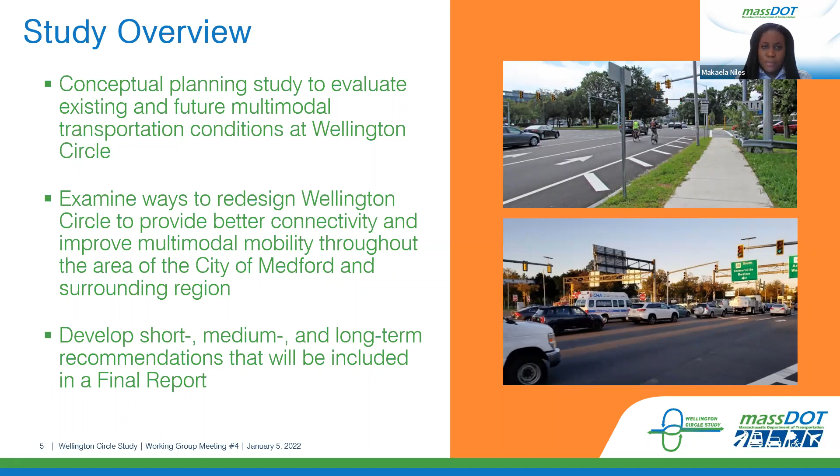Thank you, Makaela, and good afternoon. So I'm going to run through quickly the process overall for developing the alternatives and concepts that we've been walking through and where we're at this point.

You recall previously we had shared some preliminary concepts, how we were screening those through fatal flaws, but we were primarily at that point talking about automotive traffic and how vehicles are getting through here as that first level of assessment to start to develop some concepts, with the promise and the understanding that we're going to start looking at pedestrians, bicycles, transit. That's really what we've been doing since we last met, screening those alternatives through those modes, looking at additional fatal flaws to try to filter out and refine those concepts, and then identifying the feasible concepts that we can take into that detailed alternatives analysis, comparing and evaluating them based on the goals that were established.

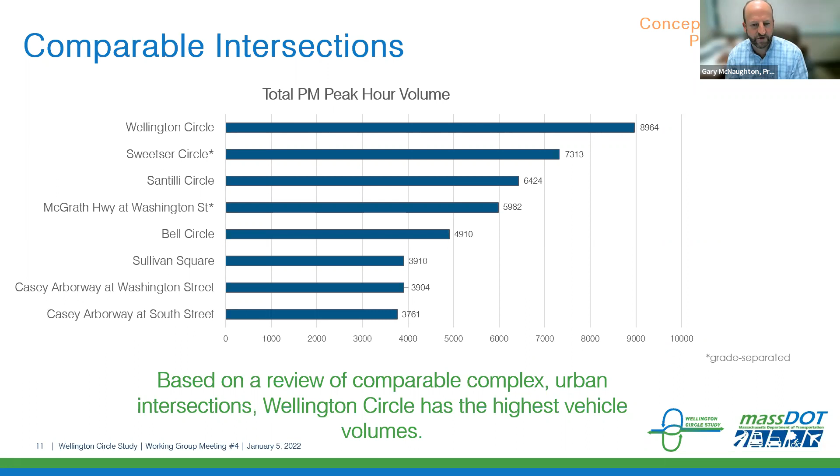When you go down to the bottom of the list at Casey Arborway, for those familiar with the Forest Hills area, the two main intersections are each carrying less than 4,000 vehicles per hour. So it really does put in context where Wellington Circle sits in terms of how much traffic is processed through this intersection. It's quite an amazing amount—even the other grade-separated ones don't approach that volume. So you see the challenge we have in trying to come up with solutions to improve operations and accommodate additional modes through this area.

As you recall, we looked at some basic concepts, typical intersections and how those could work. We concluded, not surprisingly, that a traditional intersection isn't really going to be the solution here, but there were benefits of pulling that Middlesex-Fellsway connection out of the primary intersection along Route 16, which we'll talk about in a moment regarding short and medium term concepts, and you'll also see that carried forward into the long-term concepts. We also talked about advanced concepts—continuous flow and quadrant roadway—which I'll touch on in a moment, and grade separation, where we'd narrowed it down to that east-west connection as the one showing potential for a grade separation alternative.

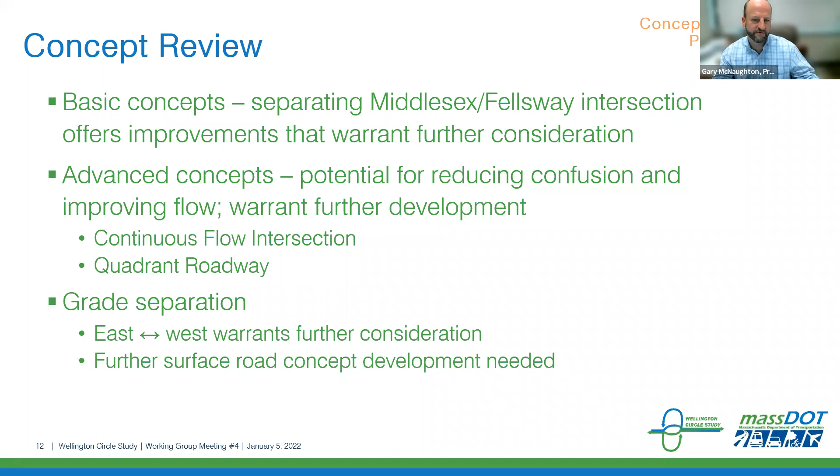When we looked at the continuous flow intersection, the concept is that left turns cross the opposing through traffic in advance of the intersection so they're able to flow at the same time as through movements. We had some early promise on this, but as we looked further, it started to fall behind the quadrant roadway example. The challenges for pedestrians and bicyclists through the continuous flow intersection became problematic—picture vehicles coming at you from unexpected directions as you're crossing the roadway. So we ended up dropping this from consideration, and you won't see any more continuous flow alternatives as we advance the project further.

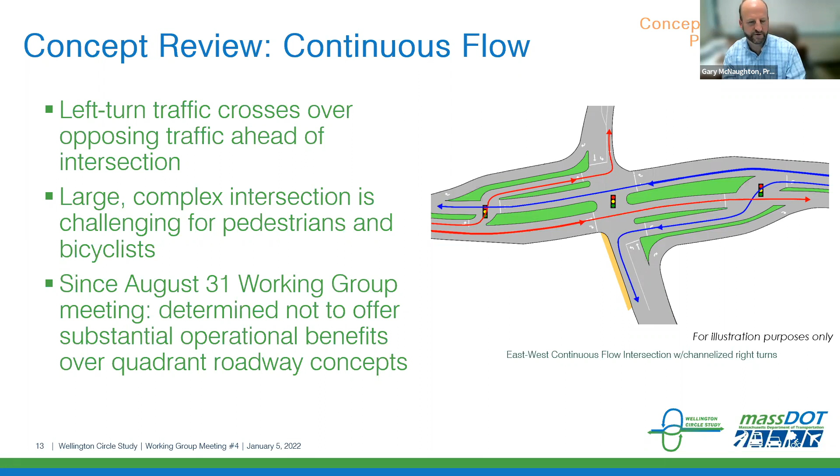But the quadrant roadway connection did start to show some promise in this area—not just for that connection from the south and off to the east between Fellsway and Revere Beach Parkway, but you'll see elements of it on the north side connecting up to Fellsway and off to Revere Beach Parkway, where we started to see some benefits. It lets you redirect those heavy volume connections out of the main intersection and shift them off to a separate intersection, so individually your intersections can be simplified. They don't have to accommodate every movement—we can restrict left turns and such at those intersections to make them work more efficiently.

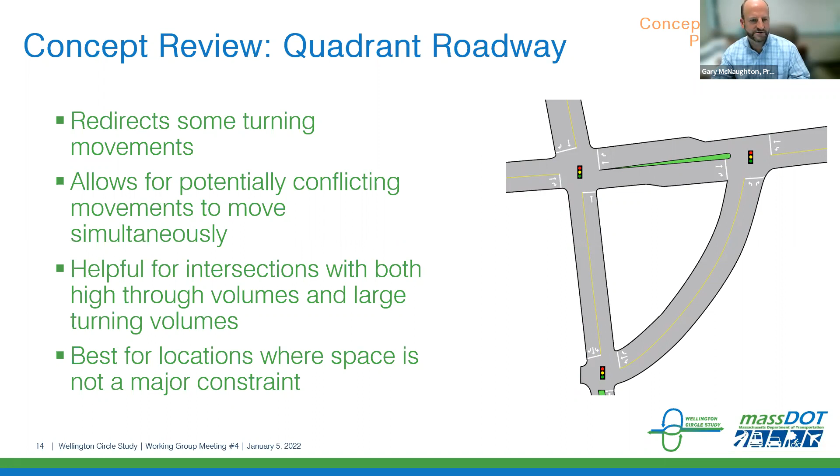So some examples of quadrant roadways, what do these look like in the real world? These are not directly applicable, it's hard to find an environment exactly like Wellington Circle, but we tried to pick a sampling of other locations around the country. You can see that these offer different opportunities for land uses within the middle.

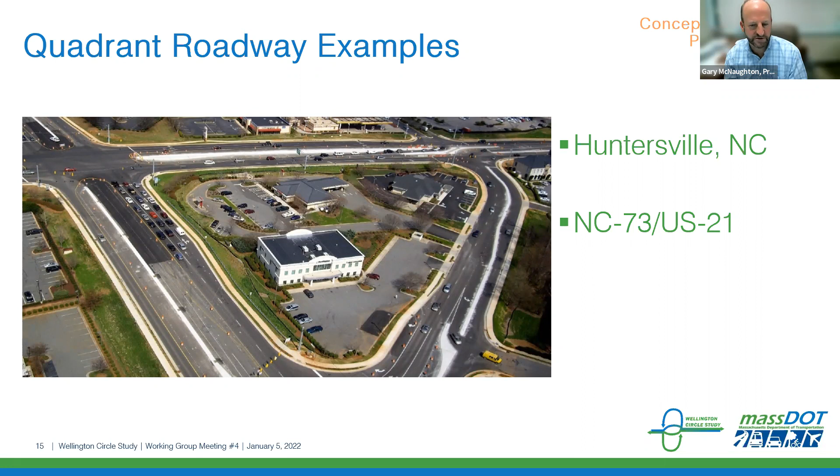We're not anticipating putting buildings in there, but you have access to those areas between the quadrant roadway. You can still provide connections onto the outside. You end up with signals at each end of the quadrant roadway, as well as at the primary intersection, which is what you'll see on the alternatives as we've advanced them.

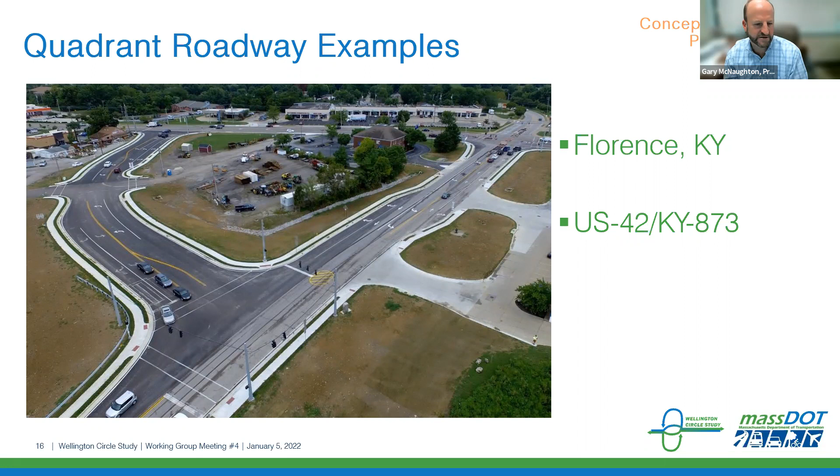This is another example, again just showing a little bit less intense use in the middle. This is mostly construction laydown areas, the project is still being built. But again, another example showing how that quadrant roadway looks, how you can still use it to maintain connections to those abutting properties.

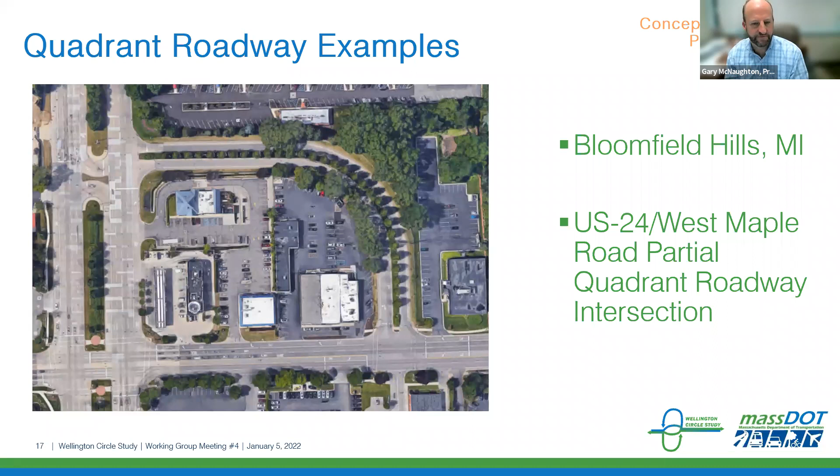So where we're at is we're really looking at two core long-term concepts. One is a grade separated one, which we'll talk about towards the end. The others are variations of that quadrant roadway concept, and we have two different flavors we'll be talking through. Each has slightly different benefits, advantages, and disadvantages that we'll be evaluating as we advance the project forward. We've also been developing short and medium term concepts, things that can be implemented that aren't full build, don't require the entire intersection, but we think can offer benefits to improve mobility through the area without having long-term design efforts and construction impacts.

We've also been spending a lot of time working at other modes, trying to figure out how every one of these alternatives handles peds and bikes traveling through them. We've been considering transit, but we'll talk about why we don't have transit quite as fully developed, given moving parts like bus network redesign and Silver Line and other things that may change the routing we're looking at. But we're certainly considering transit as we advance through the project and alternatives development.

The one thing we have taken off, and you may recall we talked about this before, was possibly converting Middlesex Ave to one-way northbound, away from the intersection, to remove that movement and simplify operations. When we started playing around with that and incorporating it into concepts, we saw that it didn't give us benefits that outweighed the impacts of changes in travel patterns that resulted in vehicles diverting to already congested areas, really creating more problems than it solved. So we've taken that one out of our alternatives at this point.

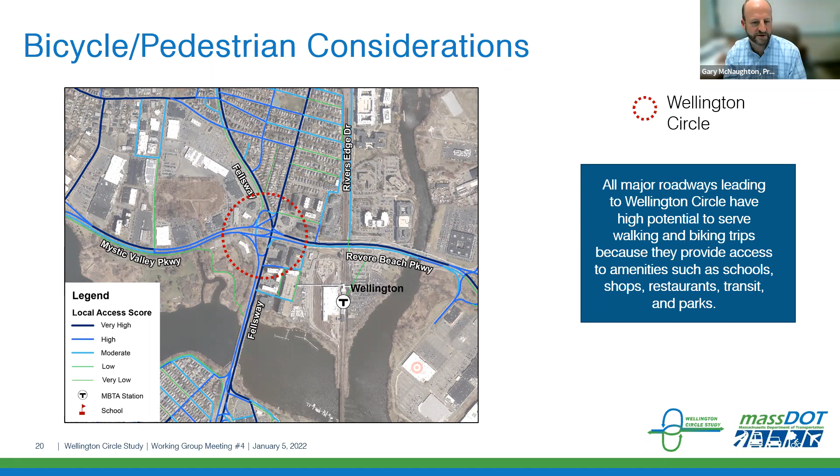When you look at the bicycle network in the area, you do see that void. There's a big gap between some of the existing and planned bicycle facilities, and Wellington Circle becomes that area that's a barrier to connecting between these different facilities. We're really working on making sure that barrier is removed so bicyclists can get through this area and make connections to those other facilities being constructed.

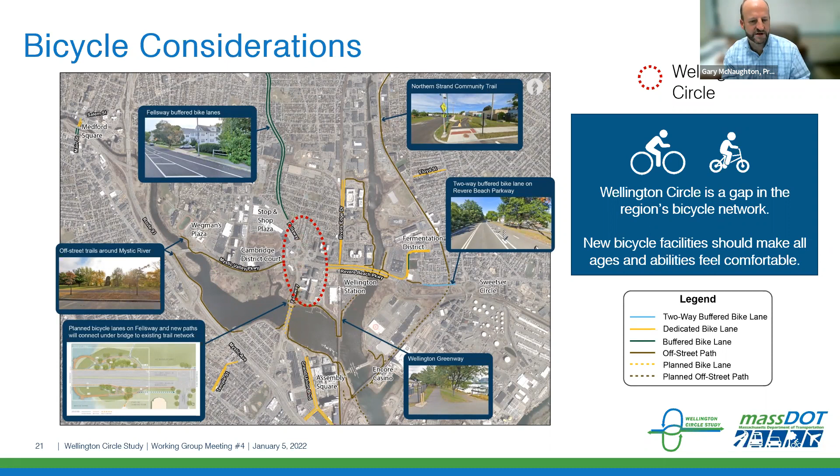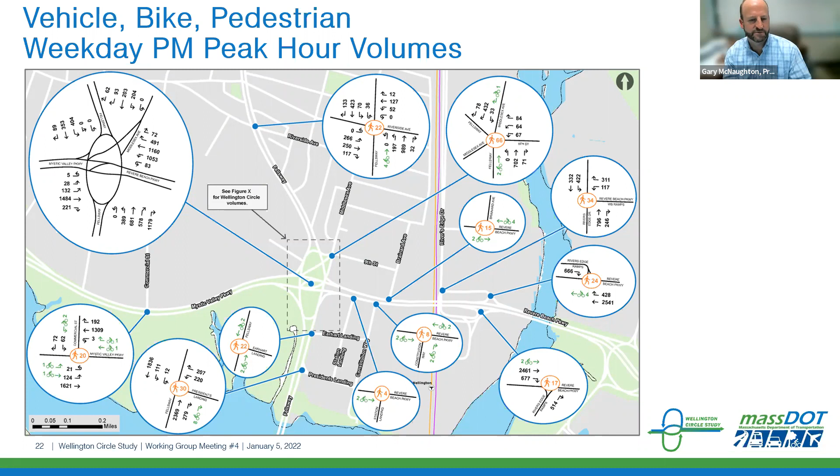We also have all of the data behind it, not just the vehicle volumes we've been talking about previously, but all of the pedestrian volumes. This information has helped inform us on desire lines, where pedestrians need to connect to. We also have the bicycle volumes. Not surprisingly, they're very low in this area, but we also know there's a high potential for bikeability, and if we build it, they will come. So we're not just tying our hands with the bicycle volumes that are out there. We're really looking at building facilities that will encourage more folks and accommodate the folks that would be here if they could be here comfortably.

So I'm going to turn it over to Deanna to talk briefly about some of the short and medium term alternatives. Thanks, Gary. So as Gary mentioned, I'll be discussing the short and medium term concepts that we started analyzing. This includes dechannelizing right turn movements, removing the eastbound left turn movement through the circle, relocating Middlesex Ave, and then a combination of the above concepts.

In some circumstances, dechannelizing right turns can improve connectivity, reduce pedestrian crossing lengths, and increase pedestrian comfort. But they can also create high vehicle delays, long queues, and challenges with signal phasing and timing.

So we've started to look at each quadrant separately and determining the pros and cons of dechannelizing each of the right turn movements. Currently, the northbound right and the westbound right in the northeast quadrant are signalized and have high right turning volumes, particularly the northbound right, which has very high volume.

We haven't shown this dechannelization being taken away because it's really clear in the analysis that it needs to stay. It is possible for the westbound right to be dechannelized depending on other improvements that are proposed. The southbound right and the eastbound right are currently unsignalized and could possibly be dechannelized and brought under signal control. The southbound right is low volume and the impacts are less.

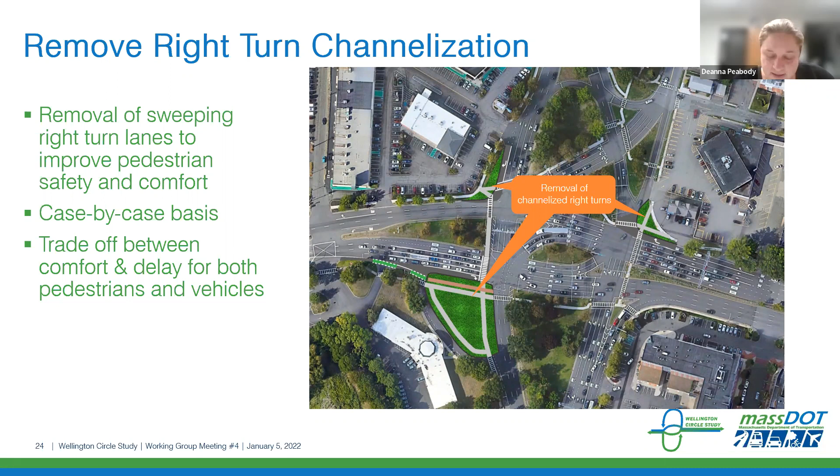Another concept we've been analyzing is prohibiting the eastbound left turns from Revere Beach Parkway to Fellsway northbound. This is not a major movement through the circle and would reduce delay for the westbound movements, which are very heavy, particularly the westbound right turns, by removing a conflict from the intersection.

Since it improves the westbound movements, it also mitigates the impacts of removing the westbound right turn channelization on the northeast quadrant. As you can see, this would enhance eastbound bicycle accommodations and shorten the pedestrian crossing distance across Revere Beach Parkway. This concept would also require the removal of the eastbound right turn channelization so that vehicles that would have taken a left will then be able to instead take a right before getting over to the left lane and making the U-turn to head northbound.

So that would be a requirement for this alternative.

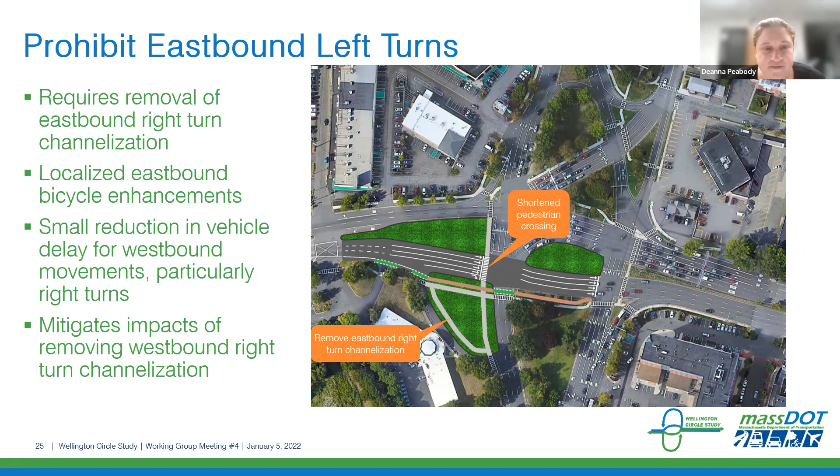Another concept we've been analyzing is relocating Middlesex Ave so that it intersects with the Fellsway north of Wellington Circle. This reduces vehicle delays for critical westbound left turn movements as well as southbound movements on the Fellsway by removing a fifth leg to the intersection and taking out a phase from the intersection, allowing for reallocating time at the signal. As you can see, this provides a large opening of green space, as well as simplified, reduced, and shortened pedestrian crossings.

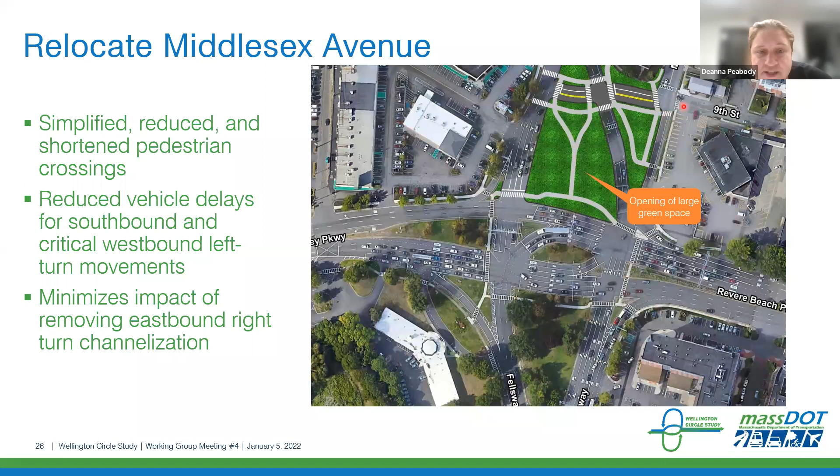This also minimizes the impact of removing eastbound right turn channelization.

This alternative combines the last two to eliminate both eastbound left turns as well as relocate Middlesex Ave. The results of this alternative combine the improvements from the last two alternatives, with overall operational benefits for both pedestrians and vehicles. It also mitigates the impacts of removing the right turn channelization in both the eastbound and westbound directions.

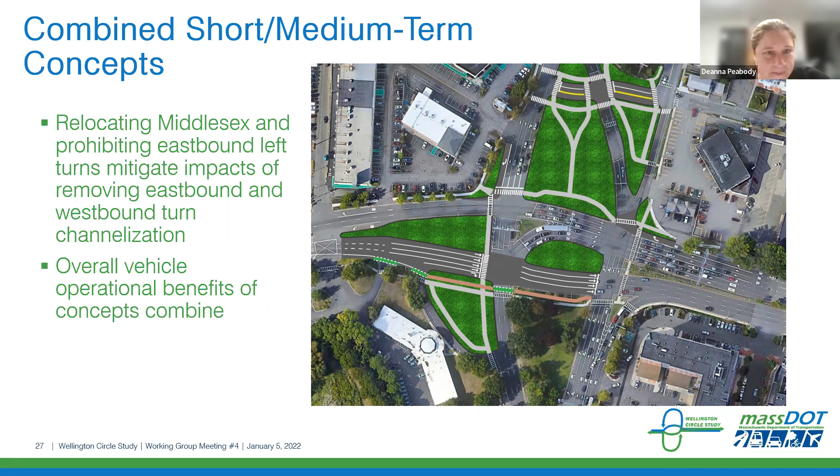In conclusion, we are continuing to investigate these short-term and medium-term concepts to determine what makes the most sense to come out of this study for recommendations. I'll now turn it over to Conor to discuss the longer-term alternatives.

Thank you. As Gary was discussing, we've primarily been looking at the vehicular concerns in and around Wellington Circle, but we've put more of a longer term focus on improving multimodal transportation throughout Wellington Circle. I'm going to go into some of the potential considerations that will be included in the concept and the overall final design of Wellington Circle and the at-grade alternatives we've developed or that will be developed.

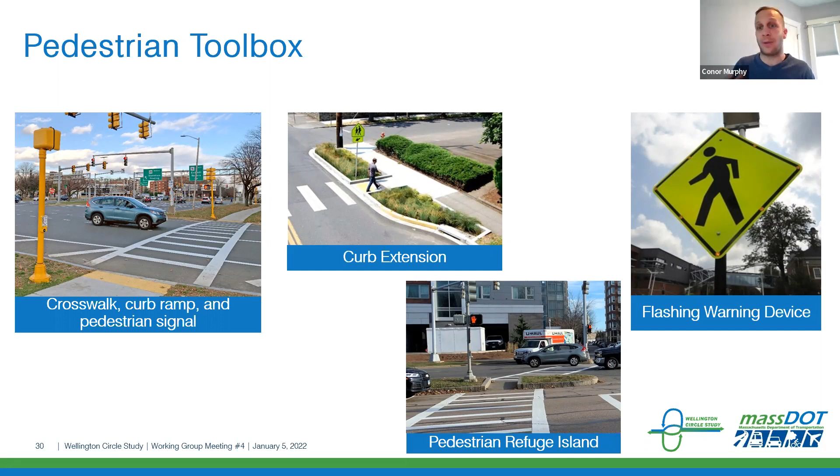While pedestrian facilities do currently exist throughout Wellington Circle, there's an opportunity to improve these facilities given the amount of space that will be created with the changing roadway alignments, whether that's shorter crossings or more direct pedestrian routes. Those are both goals we have that can be achieved throughout Wellington Circle.

With the revised alignment, there's also a much larger opportunity to create more green space and more comfortable pedestrian facilities with new amenities, whether it be lighting and street furniture, improved green space, or more buffer between vehicles and pedestrians, and so forth.

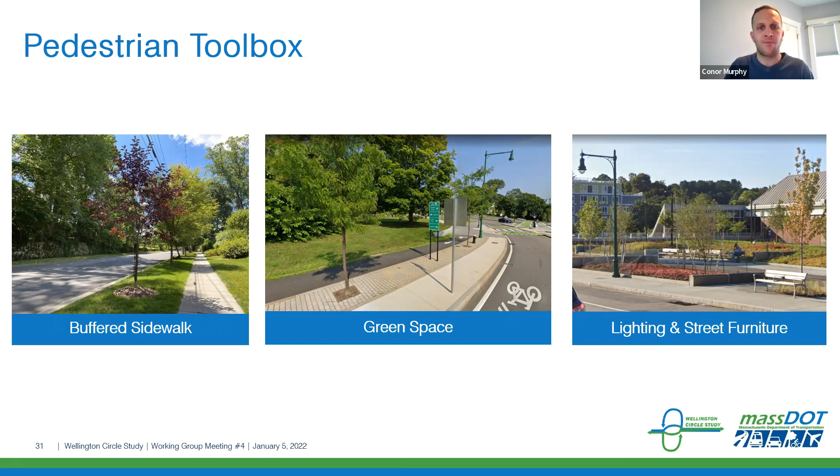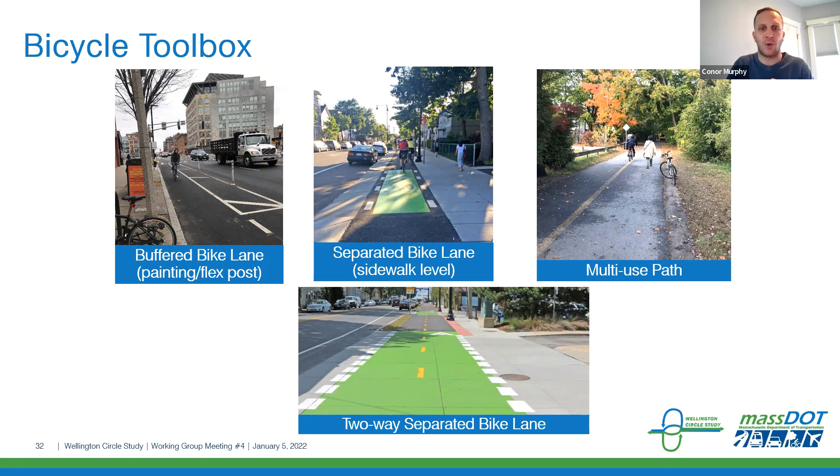From a bike standpoint, there are currently no bike facilities traveling through Wellington Circle, as Gary pointed out earlier, but there are certainly connections to be made adjacent to Wellington Circle, providing an opportunity to create more comfortable bike facilities throughout the area. This includes potential sidewalk-separated bike lanes and on-street separated facilities to connect to the existing facilities adjacent to Wellington Circle.

When we're designing for bikes in this complicated network, this is going to require signalization and intersection design to help bikes traverse the various crossings throughout Wellington Circle. This means potential bike signals to help facilitate these crossings, or creating protected crossings wherever possible to provide the most comfortable network for bicycles at the intersections.

From a transit perspective, I know Gary alluded to this earlier, but there's a lot of moving parts in the plan for transit through Wellington Circle, with the Silver Line and MBTA service planning studies reviewing this area for potential use going forward.

As of now, we haven't necessarily included any specific transit components in the alternatives analysis, but there are plenty of options to review for future consideration, ranging from exclusive bus lanes that we're seeing a lot around our area right now, all the way to simply incorporating bus stops throughout Wellington Circle, whatever the design ends up being.

Given all that, we're going to move into our two at-grade concepts we've developed so far, starting with one we're calling the triangle. This is a bit more of a dual quadrant roadway system.

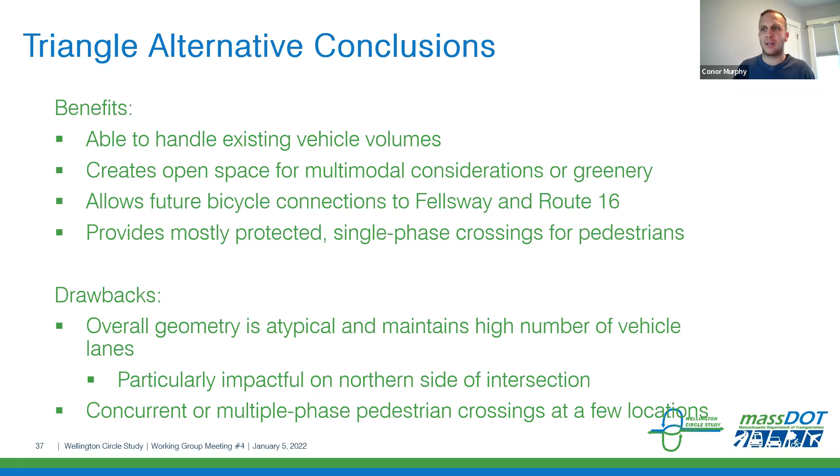Moving forward from there, we're getting into our second at-grade concept, which you'll notice the main difference north of Mystic Valley and Revere Beach is more of a square than a triangle. So this is where the square concept comes from. Overall, it's a pretty similar concept, still a dual quadrant roadway system.

The main differences you'll see with the square: we still have bike and pedestrian connections through the middle of the square, and those will allow connections north, south, east, and west, depending which way you're going. It's also more of a traditional intersection layout, which will be more familiar to drivers moving through the intersection. But from a vehicular standpoint, you'll see a couple of changes from the triangle alternative.

So if you hit the next button, you'll see first, if going from Fellsway southbound to Revere Beach Parkway, it's a bit of a left-right-left scenario to turn left onto 9th Street, right onto Middlesex, and then left again into Revere Beach Parkway. This is the same amount of existing intersections it is to make this move today. The difference between the triangle and the square concept is that the Middlesex Ave intersection is signalized in the square. It was unsignalized in the triangle concept. So that is the big difference between these in this case. But again, with signalization, we can make this movement pretty efficient.

Same thing with the next movement here, moving from Middlesex down to Mystic Valley and the Fellsway. We're looking at 3 intersections to get through this entire movement, which is actually 1 less intersection than exists out there currently. So that will hopefully help make this a bit more efficient.

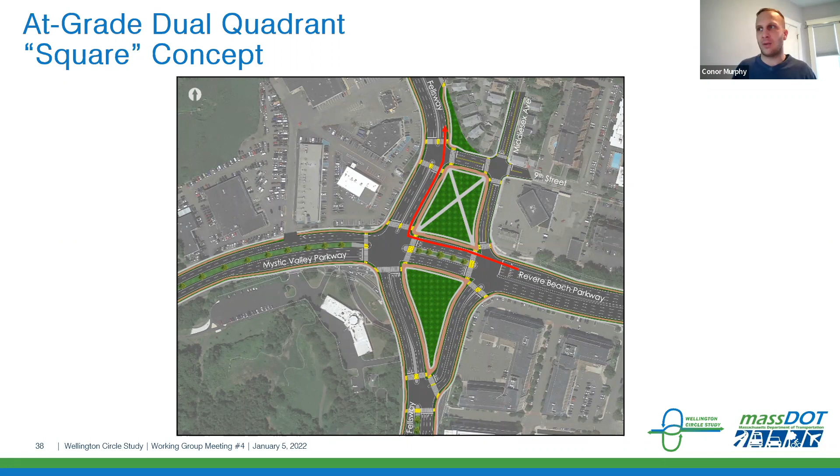And if you move to the next slide, Natalie, we'll see overall that the concepts are pretty similar, as I said. We really just see that certain connections work better in one rather than the other. And we'll be exploring these more when we get to the alternatives analysis and kind of start diving into them a bit more through there.

So before I pass off to Nate to talk about the grade separated concept that we have, there's still, even with the grade separation, an at-grade network of roadways that are still incorporated. So I wanted to talk through those a tiny bit before allowing Nate to talk through the grade separation piece specifically.

Overall, there are still a lot of intersections given the various traffic patterns that we have going through this area. The positive is that those intersections become a lot simpler based on the removal of the eastbound and westbound movements being overhead.

So a few different ones specifically. We obviously have heading northbound and southbound coming from Revere Beach Parkway. You can split that at a split intersection underneath the grade separation to head towards the intersections on either side of the grade separation to continue on north or south of Fellsway.

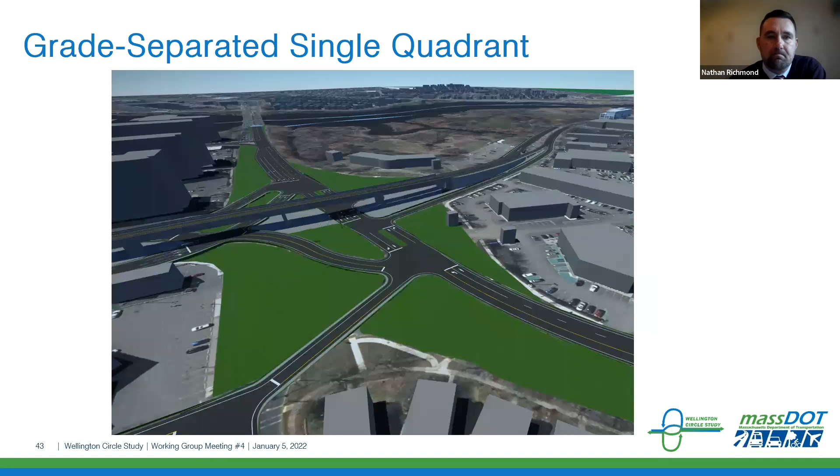So again, here's just another view of the overpass, a little bit more close up. You're looking in the southwest direction, and you can see under the bridge a little bit, which gives a better angle from ground level depicting what that might look like.

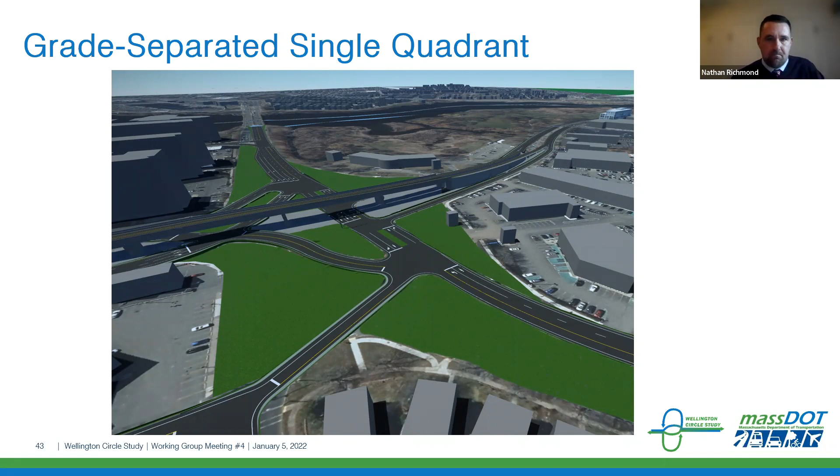The other concept we looked at was an underpass, and we quickly realized there were several issues that would make it more costly and potentially disruptive to traffic. The first being that there could be severe traffic impacts if the underpass was closed due to a flood event or a rainstorm. We looked around.

The Mystic River Watershed Association has a bunch of maps that cover potential flooding due to rainfall and climate change. And the maps show that by the year 2070, the Wellington Circle area will likely be a significant risk for flooding during a relatively common rainstorm.

So any type of underpass option is going to require a pump station and the supporting drainage and utilities associated with that. The next potential issue is increased probability of encountering utility conflicts during construction. When you're building a 1,200 or 1,600 foot long tunnel and boat sections, you're going to come across utilities.

One worth noting is the MWRA has a 48-inch water main that serves as an emergency backup water supply running down the Fellsway to Middlesex Ave. This would most likely need to be relocated at significant cost to the project, along with any other utilities that would come into conflict.

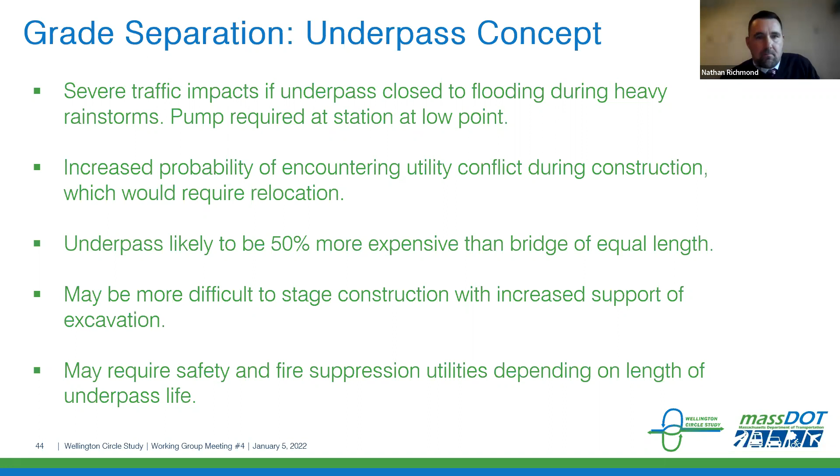These are our conclusions based on the grade separated option. The benefits are it removes major movements from the surface roadways and limits the number of lanes required to handle existing volumes. However, the drawbacks are that surface roadways still require a high number of lanes, the bridge is pretty long and uses significant space at grade, and the bridge acts as a visual barrier bisecting the transit station from nearby residents and businesses.

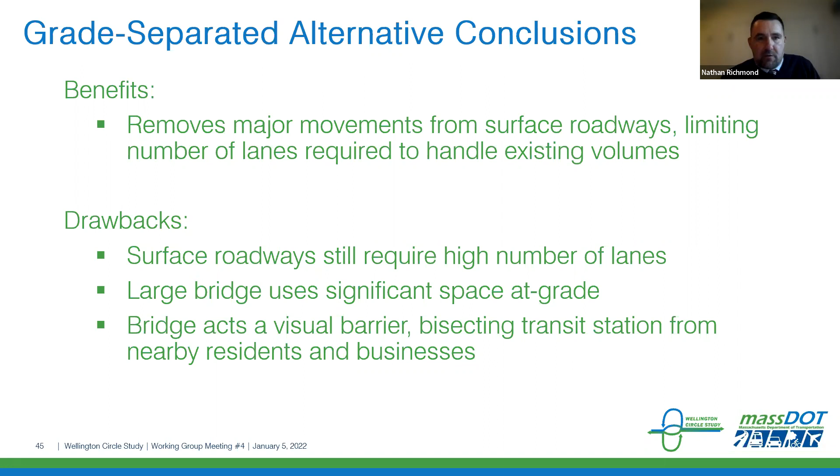So from here, I'm going to pass it back to Gary to go over the alternative refinement. Thanks, Nate. We do see the questions and hands raised, and we'll be opening up for discussion in a moment. I just wanted to wrap things up on what's going on next and how we got to where we are.

I know one of the questions was about traffic volumes and what we've used. Everything developed was based off existing, pre-pandemic traffic volumes. One of our big next steps is figuring out future volumes, looking at long-term impacts from changes in travel patterns relating to the pandemic, as well as mode shift and growth in the area.

We're not working alone on that effort. Both the Silver Line project and the McGrath Boulevard project are working on that same effort of identifying future volume scenarios and what's right to plan and design for. We'll take all of that into consideration as we advance these concepts, looking at updated and future traffic volume scenarios, advancing short and medium term concepts, and how the analyses work with those different volume sets, as well as for longer term concepts.

What happens with some of the transit integration we've talked about? Can we help facilitate mode shift? Can we better accommodate existing and planned transit service, some of the things on the drawing board for updating and modifying bus routes and bus service such as Silver Line through the area, and expanding out to look at connections to existing facilities?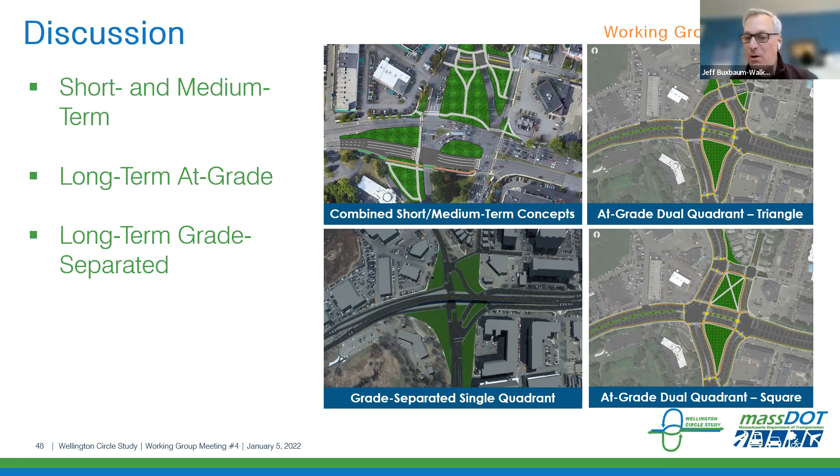I think that's important. So, take the money you save by dropping the bridge option and put it into the transit. I think that would be money well spent. Thank you guys for doing a good job.

Thank you. And the timing of the other transit efforts, both Silver Line and the bus network redesign, are going to allow us to incorporate those as we advance.

Those projects are moving along in the coming months, and we'll have some more clear direction that we can build upon. Yeah, but even a transit lane, it just feels like we're going to do major work to this intersection, not incorporating transit priority. I mean, you're doing it in other places, so it just feels like, how?

And I saw some of the comments in the Q&A. We should be talking about getting the volume down. So that's an interesting question, and it's tough. Philosophically, on an individual project, to say we're going to take the lead is tough. So I guess the message to MassDOT to take back to your bosses is it really should be coming from the top that says this shall be the case if we are serious about the climate change stuff we're talking about.

So thank you, guys. Thank you, Doug, I see your raised hand. Yes, can you hear me now? Yes. Okay, thank you, I apologize for that.

I think there's some great ideas here in the short and medium term concepts. There's a lot better pedestrian, bike access, more green space. There's some great ideas there, so I think that's all pretty good. I'm disappointed that there's not a little bit more there for transit. You did address that, but it seems like that would be the next step to try to push that a little bit further.

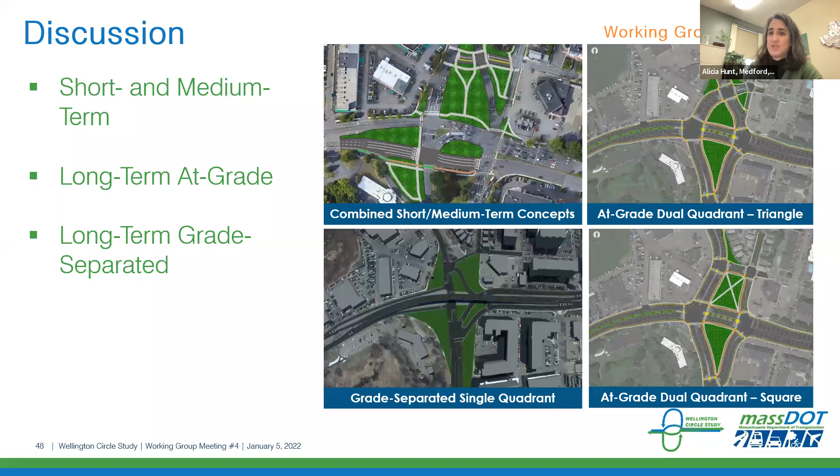So we're working on strategies with the state and federal government to prevent that from occurring. I realize that's not the only roadblock, and mild flooding would always occur. We have underpasses today that flood fairly regularly. But I'd encourage you to actually speak to some of us working in the climate space before ruling it out completely, and not just base it on the maps that are out there, because we have a lot more knowledge about what's going on. But thank you very much, and we appreciate all this work. It's great. I've been asked many times recently about this study, so I appreciate getting the update at this time. Thanks.

Thank you. Nate from our project team: yes, we can reach out and try to get more insight on the climate strategy moving forward and how that would impact an underpass option, for sure.

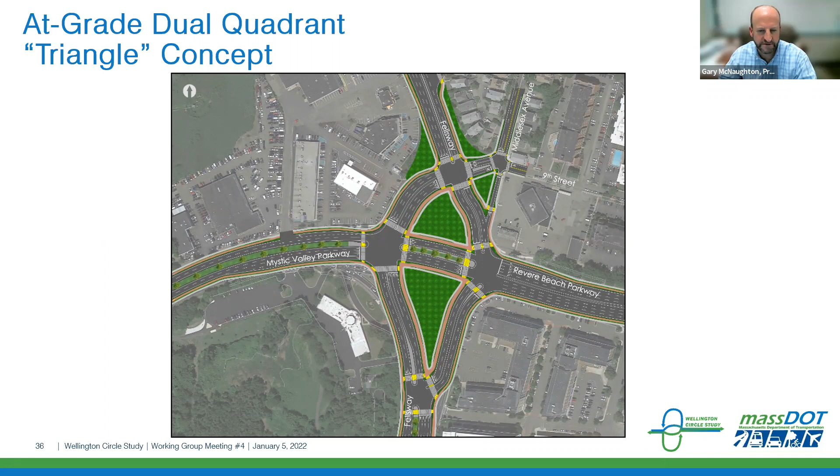The short answer is no, it will stay at grade. You always have the option of including pedestrians and bicycles on the overhead structure, but we were anticipating that they wouldn't be, because you'll have a fully accessible at-grade facility. Exactly how they go—as we said, this isn't advanced at the surface network yet to show where all of those connections would be, but you can picture we'll have them at all of the crossing locations.

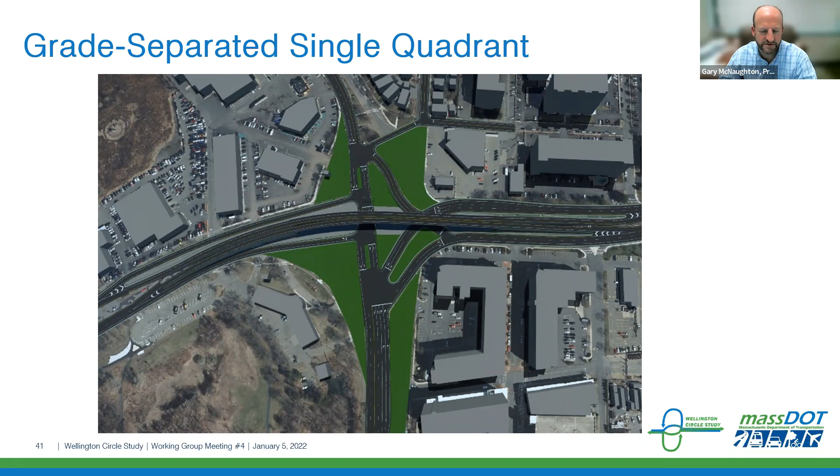So we'll develop some options for how you can get there. It may be that you're crossing the roadway and traveling through some of those green areas, trying to make them as direct as possible. We'll be adding those as we refine the surface network, and possibly flipping that structure to be underneath all of those surface roadways.

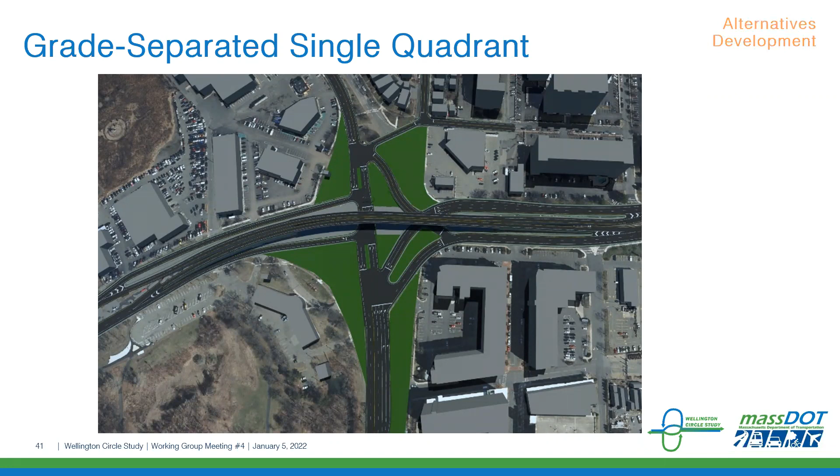So I know you're just beginning to think about future traffic demands and mode shifts, but I'm curious specifically about some of the municipal climate action plans that Somerville and Boston have adopted. I think Medford is also looking at a mode shift target. I know Somerville is looking at trying to reduce car commuting by roughly a third in the next decade or so, and Boston wants to cut car commuting in half. Most of the peak hour traffic through here is bound to and from Somerville and Boston.

So my question is, does MassDOT think that those municipal targets are actually credible? And if so, are they going to use those targets as the future condition when forecasting future travel demand?

Yeah, I don't know if Michaela wants to take it. I know we're working on the McGrath project with Brad in Somerville for DOT, and that's an area where certainly we are looking at reductions in traffic volumes. I think I pointed out it's kind of a new way of thinking about projects—certainly in this area, traditionally we wouldn't have ever looked at existing volumes to develop these concepts. We would have always said, okay, what's the volume going to be 20 years out, grow it out, and let's design for that higher volume.

We're already starting from a baseline that's level, and then as we start to look at those future volumes, can we start to look at things that push them down? Some of those become policy decisions. I know Somerville is firmly behind it in some of the choices being implemented on the McGrath project. How much of that gets translated into similar approaches on a project like this is something we need to really start to nail down as we refine these alternatives and take them into the next steps.